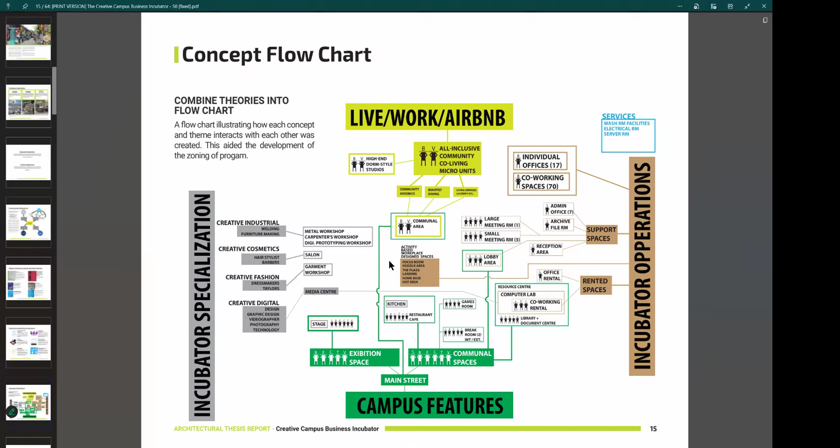A thesis project is basically your final project when you do the master's course in architecture. So last week I was showing you some examples of infographics in architecture, the use of diagrams and flowcharts and stuff like that. Now I'm not going into explaining the project, but I just said it was a business incubator. What I did was kind of went through to show how infographics is very much a part of architecture all the way to the end, which you guys already know because you presented it in your study tour, which is awesome, right?

So I won't go through those examples again because we did that in class. And if you weren't there for that class, as usual, the recording is there. What we're going to focus on today is breaking down infographics in architecture. We're going to continue our journey.

So last time we met, hopefully I helped you guys out in trying to determine what is infographics, and we kind of spent a class with me trying to hopefully guide you in creating infographics. Like I gave you a 5-step process.

It's coming up, it's coming up. There we go. I gave you a quick 5-step process in how you can create your infographic.

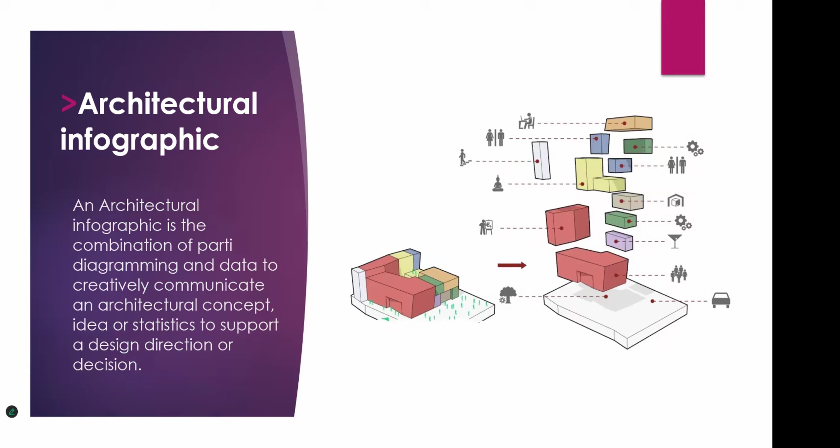So an architectural infographic is a combination of a parti diagram and data to creatively communicate an architectural concept, idea, statistics, or data. I want you guys to push your parti diagrams further, apart from just having the diagram saying look, this is the major space in this building, I want you to add some data to it. So information plus a diagram plus creativity equals infographic, which in our case in architecture, the diagram is the parti diagram, and then we just need to add information to it.

So we already possess the ability to simplify information, right? So if I take this diagram here, you guys could probably already simplify this. You guys already know how to do this already. And if you look at what this diagram is saying, it's probably saying that, okay, there is a big mass volume that is here. So you've turned it into a parti diagram.

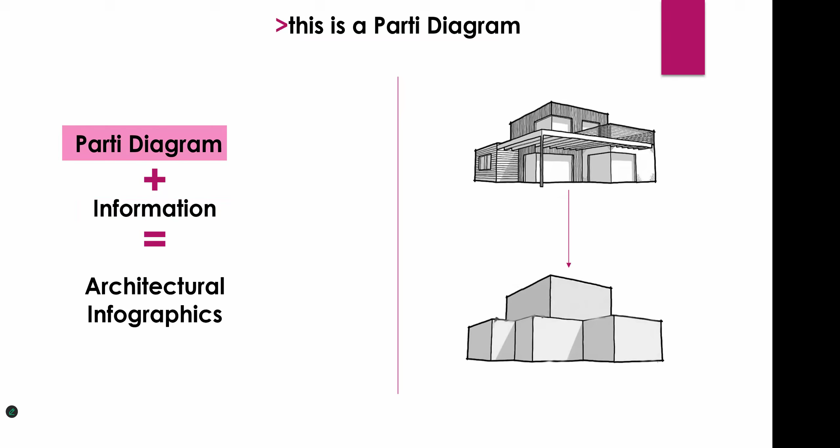But how do I communicate this information within this diagram? I mean, I could just put the text below the information and call it a day. But we could maybe investigate some more creative ways of doing it.

What do you think, Odin? Yes, I think we could investigate some more creative ways of doing it. So this is a parti diagram combined with what kind of chart? The volume chart, not quite the name. Bar. Right, Cooper got it, it's a bar chart, that's basically what it is.

So now you can not only use your parti diagram to talk about how you put the building together, but you can also incorporate it with data. And that is kind of the meat of what this whole information graphics is really trying to talk about, data and trying to express data in a creative way.

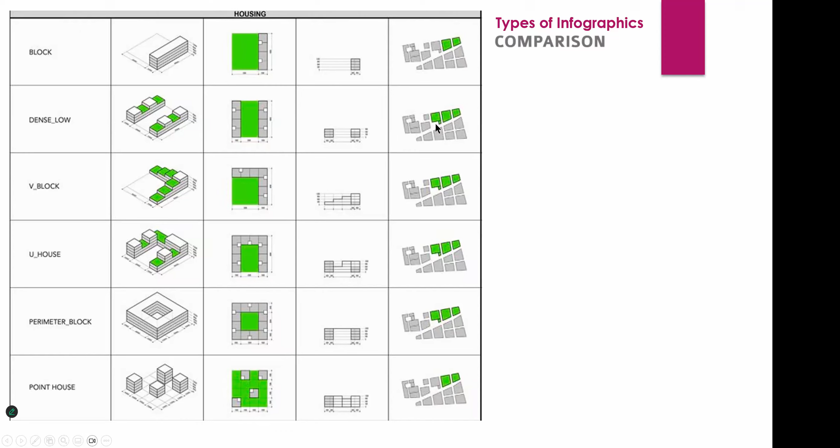This is another one as well, right? And doing something like this is great to show exploration. So for example, these are different options. You guys already did your housing project, from third year, from last year, right? You could show that you investigated different layout options for your project. And this is perhaps one of the most common uses of a parti diagram in architecture, we use it as a kind of comparison chart.

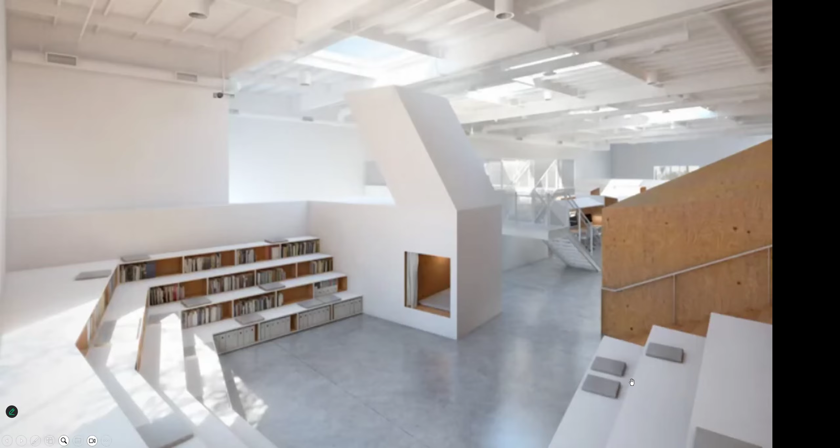This is another interesting one. Now if you look at the design on the right, I have the link here to the original design. This is in the US. Anyway, this is a hybrid office, and if you can see the picture here, it's kind of interesting - it has books that also form the seating as well. You can kind of know these spaces are well designed. But this is a nice little icon formula to say, hey, I used a bookshelf, combined it with an arena, and got a book arena. So simple, so elegant, right?

And then this is what the design looks like. So what I'm focusing on is the diagramming, because this is also information as well. It's like saying 1 + 1 equals 11, right, not 2. Because we're not talking about basic math here - we're simply saying, what if you combine a bookshelf and an arena? What would you get? It's not like a logical formula, but visually you kind of get what it's saying. So that's the information in this.

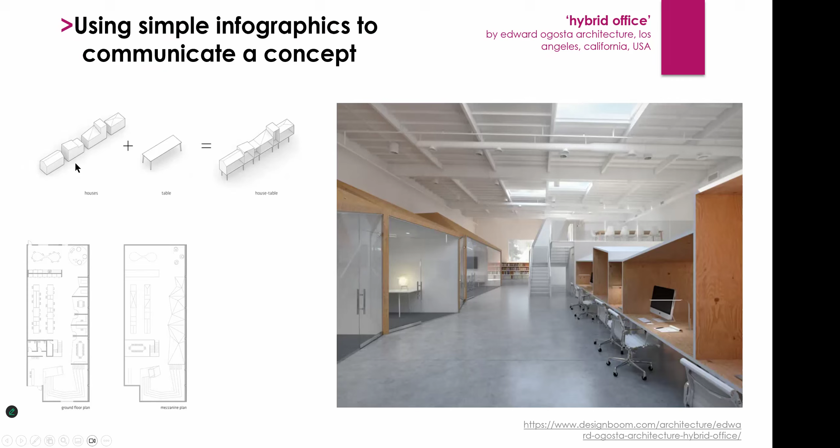It's like you're using your parti diagram to communicate additional information, not just 'this is the form of my building' or whatever. So I like these creative ways of using the parti diagram. This one is pretty cool - houses plus tables. This is what the design looks like.

So if you remember coming from infographics before, when we speak about layering of information - remember our last presentation, we spoke about how you might have a chart, but the chart could be represented as something else, and then you layer more information onto it. Kind of like that building we had that was leaning, to tell you the world's most tallest buildings but also the world's leanest buildings as well - using the exact same chart to communicate the same idea. So this is overlaying multiple pieces of information together using the parti diagram.

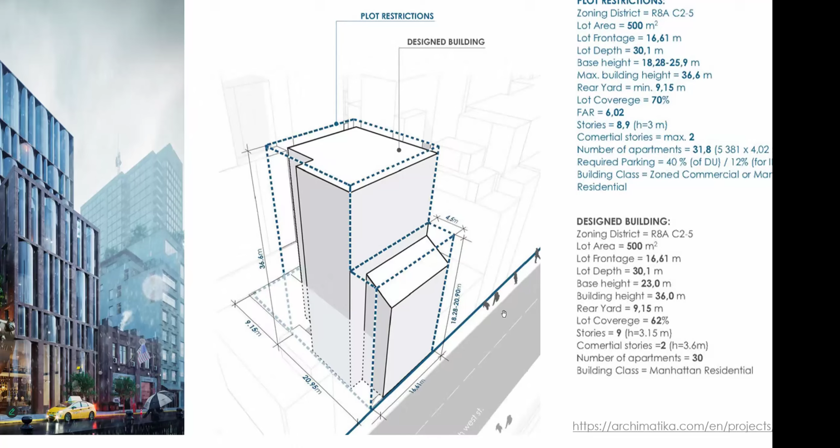So what I'll be showing you here is just ways in which you can expand beyond just having a parti diagram on your sheet. Here's another one - this one is pretty cool. This is an exploded massing diagram, exploded parti diagram, whatever you want to call it. It has different colors, but it's also communicating information on top of that. For example, the top floor has a certain amount of square footage. It makes use of these icons.

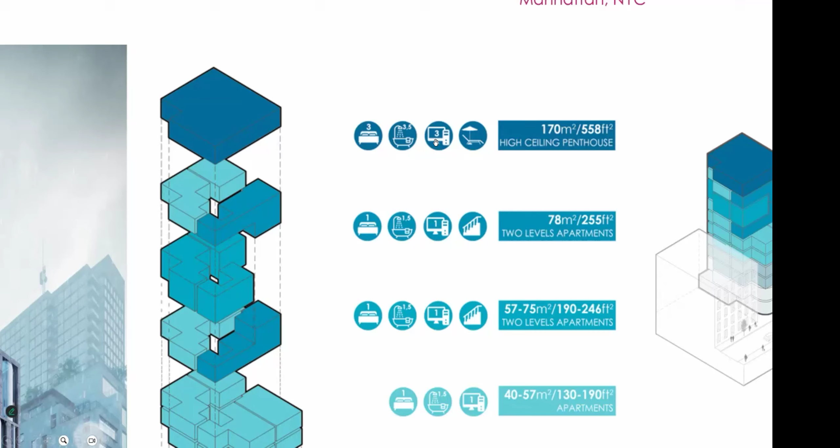Can you guys make out the numbers of this icon? I don't want to fully give it away, so I'll make somebody volunteer. What is the infographic telling me about this top floor? Anybody? What would be your interpretation?

That the unit takes up the entire floor - it's more of a penthouse. Penthouse, right? Okay, it's a penthouse.

But then look at the use of the diagrams as well - what do you think it's saying? Can you make out the text? It has 3 bedrooms. What else? 3.5 bathrooms - there you go. Exactly. Maybe 3 offices, I'm not sure what that other one is. And then maybe it has like an outdoor lounge area.

So what I'm saying is, remember what we started with in infographics - the use of icons to represent information. But now we're using the parti diagram while still using the rules of infographic design, because the color of this matches the color here. There's a kind of creativity to it, because each row has the color that corresponds to each floor. It's also communicating the shape of the building, so it's communicating multiple things in the same parti diagram. It's not like having 10 different parti diagrams on your sheet - no, you have one, and you're trying to pull out as much information from that as possible. So that is pretty cool.

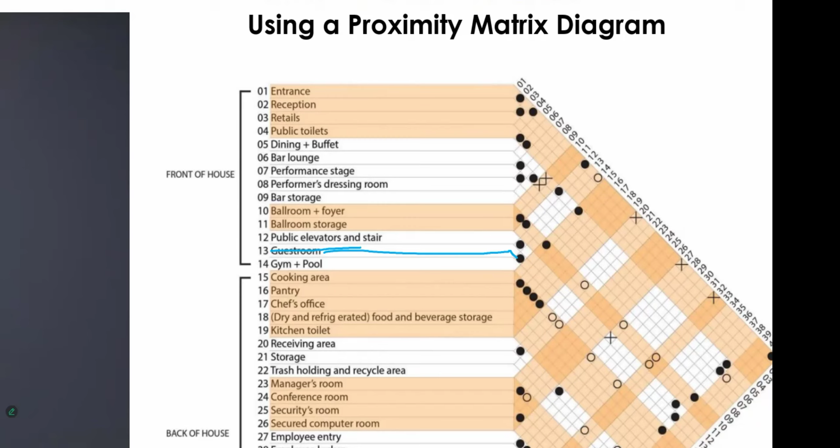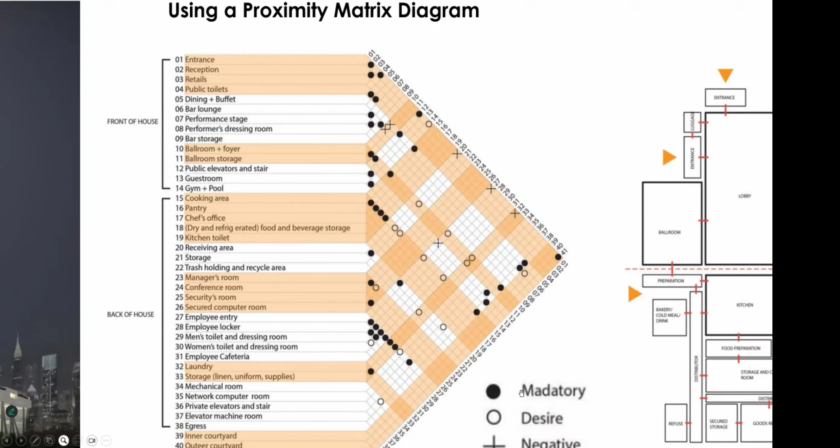Let me see what this says on the bottom. Mandatory, okay, so must be connected. And this is a desire to connect, and this is not to be connected.

So if I go back to what I was saying, without even having a bubble diagram, you can use one of these diagrams to say, I need my guest room to definitely be connected to my pool and gym. I need my guest room to definitely be connected to my egress, which is my exit. That is kind of how you read this type of diagram.

So this one is a diagram. Technically it's not a parti diagram, but it's still used in architecture a lot because you could just list your rooms here without worrying - the reason why you have this diagram is that you can design how your rooms should connect even without laying it out, because you just draw this up and shade in the areas that should connect.

So for example, you might be saying I need my dining and buffet, and you say okay, that must not connect to my ballroom foyer, but it must connect to the public elevators.

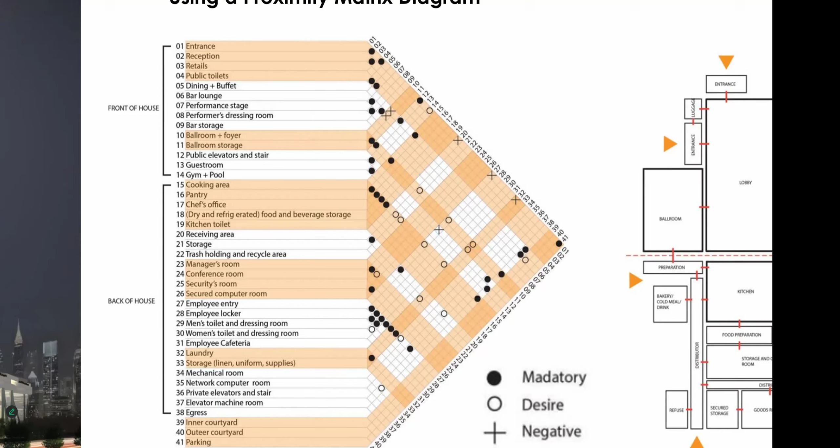So after you're done shading out this diagram, it really makes drawing your bubble diagram much easier. That's why I put this in this slide, because I don't know if you guys ever tried this strategy before. Sometimes when you get something to design, maybe you start just jumping into putting some boxes or circles and trying to figure which room connects to which. This is a more data-driven, analytical connection approach first, and then you go into the bubble diagram.

So I thought this was pretty interesting. One of these days you can try it out with one of your projects. If you have a bunch of rooms and you're trying to connect them before you do a bubble diagram, try doing one of these matrix diagrams and making them connect. Anyway, I just wanted to put that in because that was pretty cool.

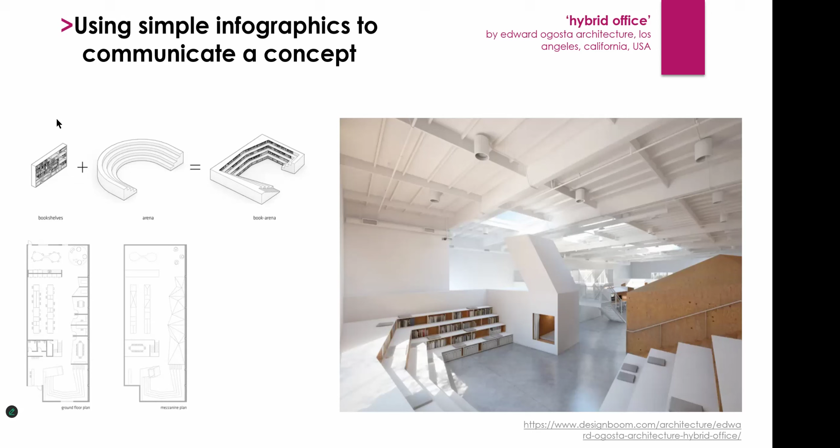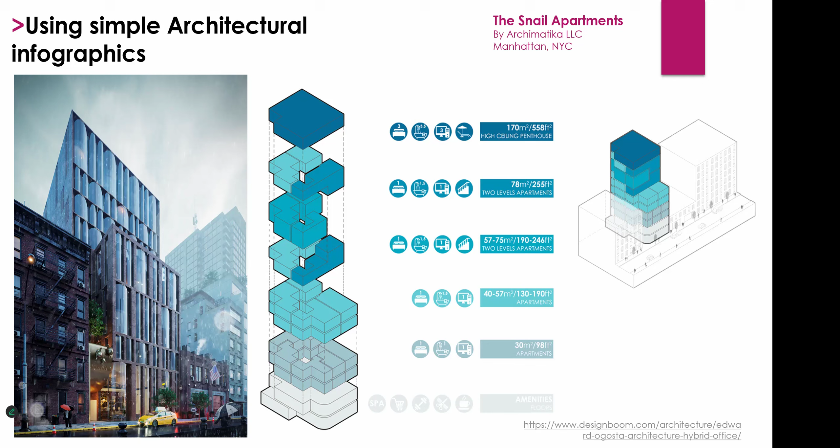If anybody here plans to move on to do your master's in architecture, this stuff is going to be super important, because going forward in architecture you start to pay attention to data a bit more. You find you have to show evidence that the data supports your design. You kind of do it now in undergrad where you do your study tour or your analysis, and the analysis says, well, there's a highway here, so you'll have noise, and this is where the wind is, and the sunrise — that's your basic data.

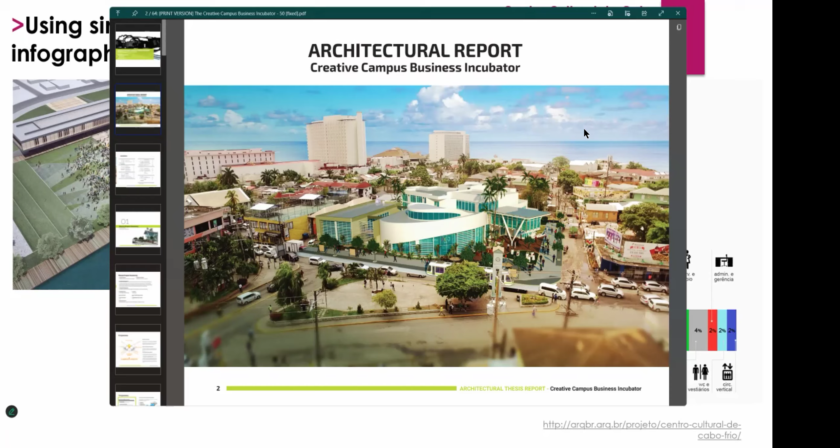But you will likely have way more data, especially when you have to do something like a feasibility study. This is what I was showing in the last class when we talked about a thesis project, because apart from just showing the plans — let's scroll all the way down here, if this can go a little faster.

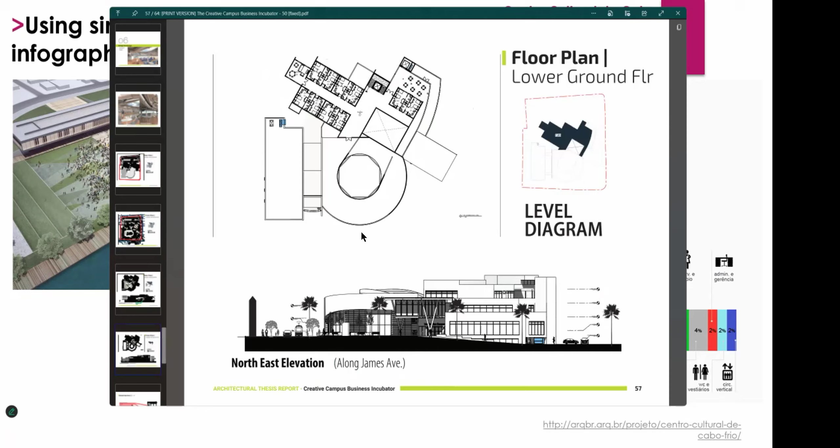Yeah, so here are the plans. The plans are in this feasibility study, elevation, sections, all of this stuff. But what drives this design in the first place? Well, you had to do your site analysis and know what's happening around the site.

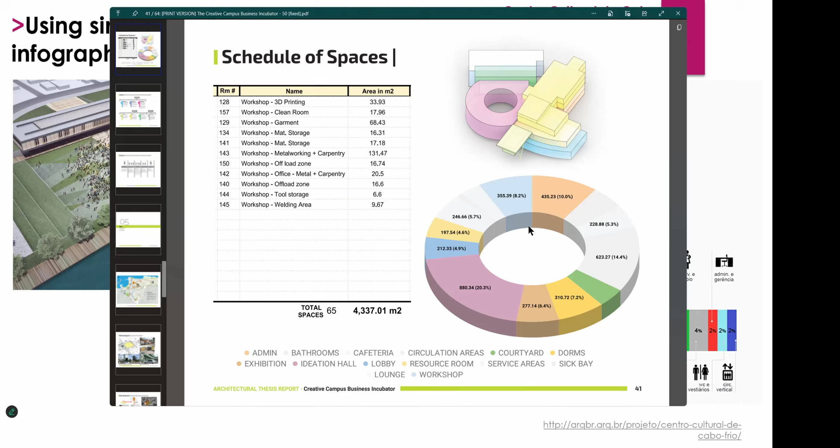But if I scroll through, there's other information to show. For example, if I'm putting up this building, how many staff members are going to be in it? What are the sizes of the different rooms? What are the requirements? Also, what about the business side of it? Like if somebody asks you to design a bank, you have to know how a bank operates. Should the vault be big, or is it just a digital thing because nobody stores cash anymore? You know what I mean?

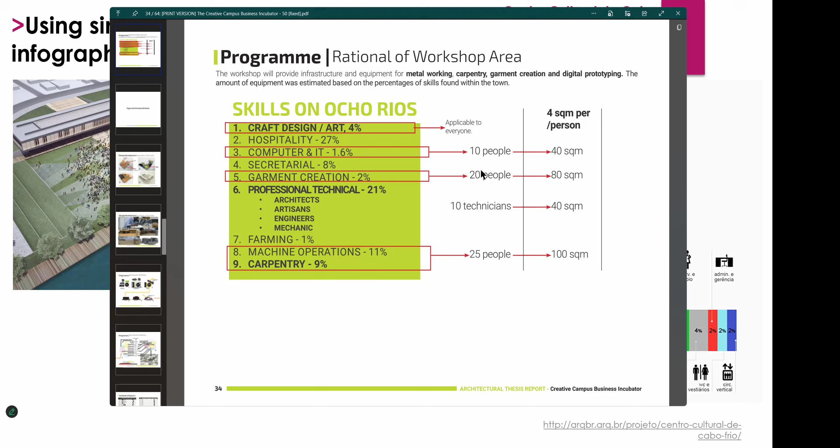So when you're presenting your idea, it has to be backed by data, and you have to find ways to represent that data. One way, especially in architecture, is using information graphics to express that data.

So for example, this one here talks about, I think, a cultural center design. The way I did it is I represented the different rooms, like offices and dining, and then there's a bar chart below. The difference with this kind of bar chart is it's telling you that in my entire building, this room here takes up 26% of my main space.

Now, Leshan, can you identify on the parti diagram where that space is? Sir? What was that, sorry? I'm sorry, you're coming out choppy, I didn't hear most of what you said. So I was saying, are you seeing the screen okay on your end? Yeah, all right, so it's the one with the picture on the left and a diagram?

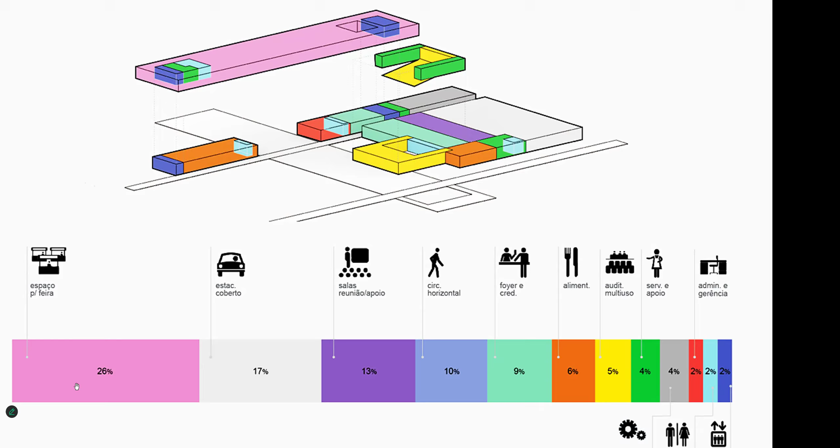All right guys, okay, hopefully I haven't left you behind. Hopefully you're following.

This is another one of my favorites. So if you look on the left, this is a 3D image here. By the way, I have links to these, so if you want to check out the page that has more information, I can give you the links. I think this is on the website as well, so if you click it, it will come up. So anyway, this is the 3D of this building.

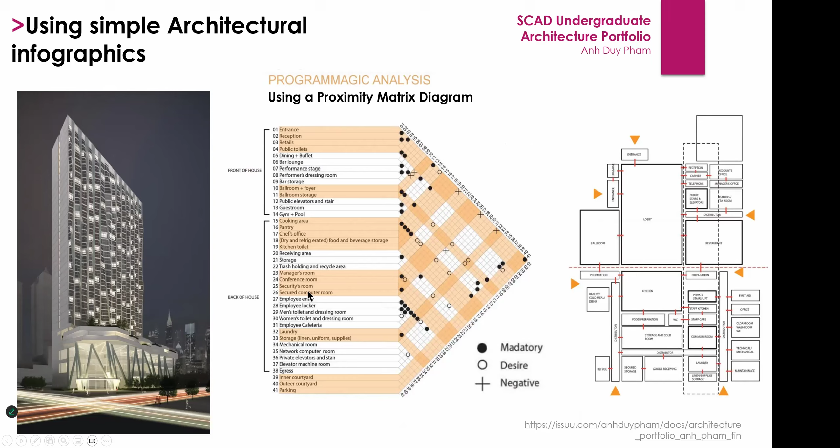And if you notice a similarity between most of these I'm showing you, these are big, complex buildings with lots of rooms. I'm showing you this because when you do a simple house, like a 3-bedroom or 2-bedroom house, chances are you don't need to show all this data because it's simple, it's done. But when you're doing something more complex, like a museum with more than 10 rooms, you should always try as much as possible not to just show a parti diagram, but to communicate info about it.

So this one is cool because what they did here is create some boxes, and they made the boxes the size of the rooms. I wonder if anybody recognizes that this infographic is the same infographic as... hold on.

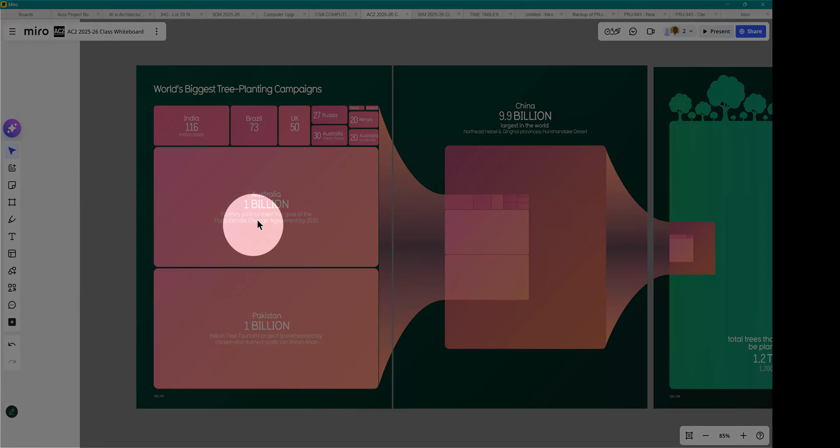It's the very same infographic as one of these guys here. You remember this one? Where we use the boxes to determine this, like the world's biggest tree planting campaigns, and use these boxes to get an idea of size. So we know right away that, well, look at China, they do the most tree planting. And who does the least? Iceland. Well, there's not much trees in Iceland, right? Anyway, this is kind of the same thing, they're just not stacked up against each other. So what this is saying is that, hey, these are all the rooms in my building.

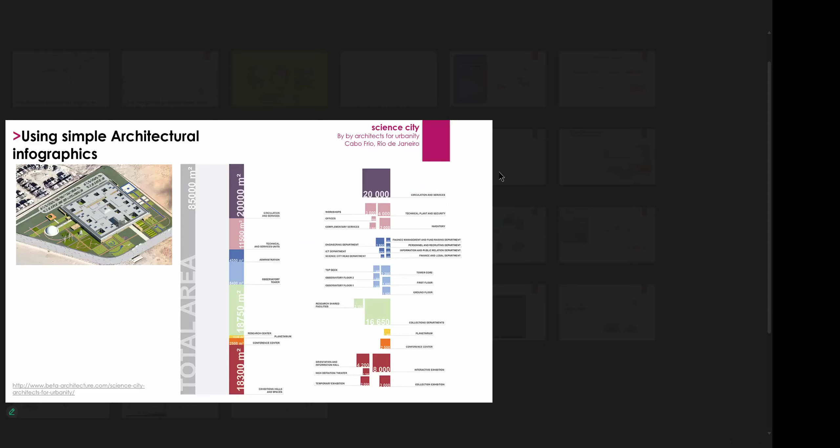These are different square footages, and this is the name of each room. But in addition to that, it has this bar chart again on the left, and you can see that all the colors here add up to give you this section on the bar chart. So really the only thing that's missing that I would probably add to this diagram is maybe color coding it in this area here.

Now this is a cool one because this is a bubble diagram, but it's a little different. As you know, a bubble diagram... one second.

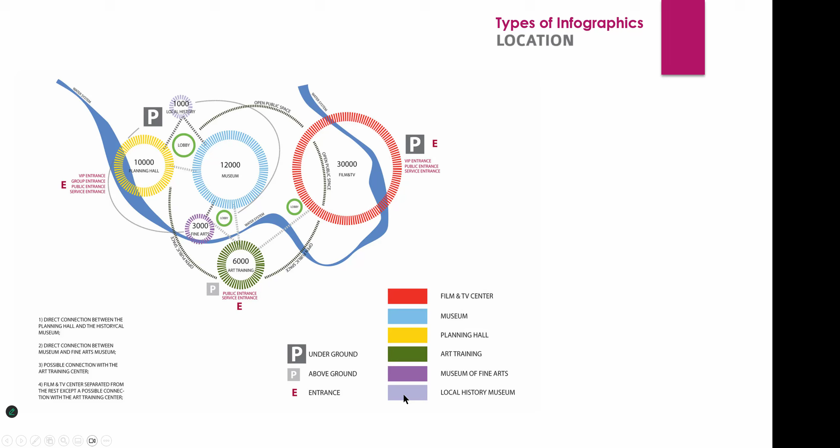Yeah, sorry about that. So this is a bubble diagram. Now the reason I show you this is that a bubble diagram doesn't have to be of a building, it can be of an entire site, and this is an example of that. You can see where the different colors show you how everything is connected together.

So I'm showing you this because sometimes in your presentation you want to reference a broad topic, like suppose you're focusing on trees or climate change, and you need statistics on how the Caribbean is dealing with climate change, or what year sea level would rise. Whenever you need this information, and maybe want to include it in your infographic, don't just Google it one place and use it. Try to get it from places like the World Bank, World Health Organization, Google Scholar, UNICEF, a lot of these places have a lot of data. Sometimes we just Google it and throw it in our presentation, so when doing the infographic, make sure your information is correct, try and get it from the source. Google can be a little all over the place.

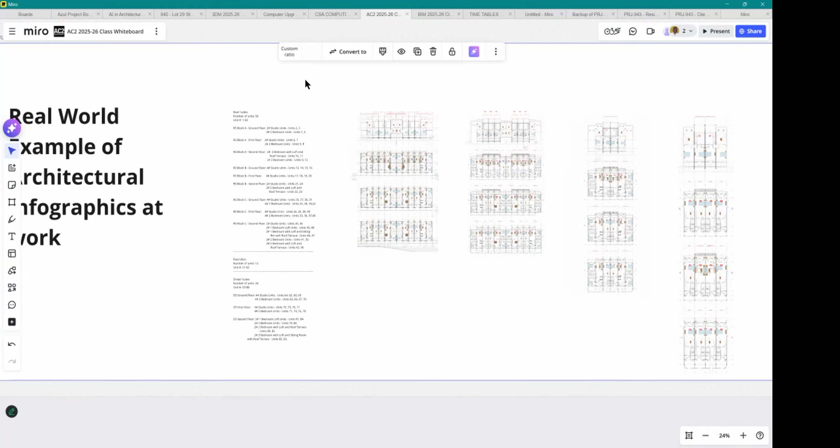All right, this is where my talking ends. Now I have something interesting to show you here. Hopefully you guys are still with me. You guys still with me? Yeah? Not gone to bed yet? Not yet, sir, we're still here. Not yet, alright, that means soon. I'm going to, what time is it? Hold on a second. Oh, we're good on time. All right.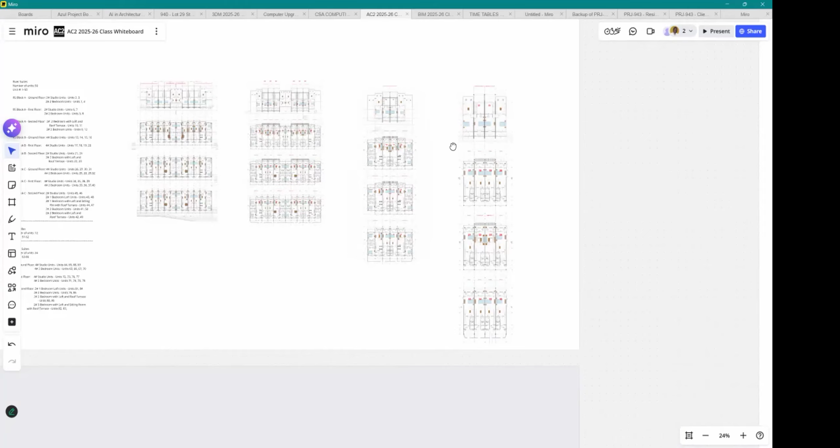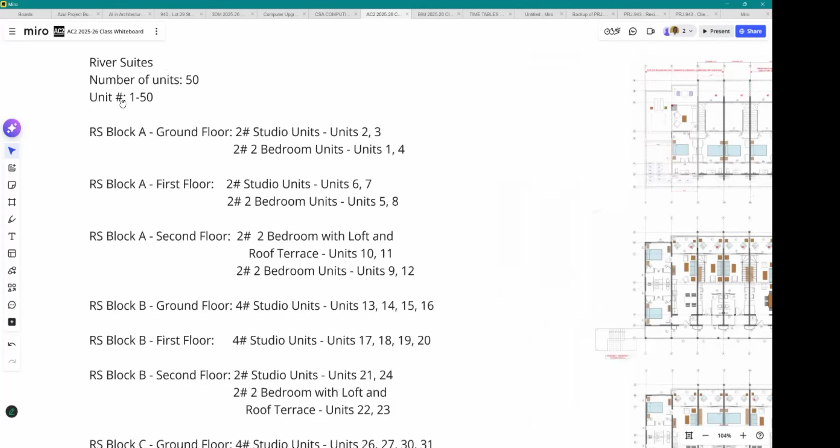So this was a project that I did some years ago, right? And it had a problem. I don't have the elevations in here. Oh man. But I had the elevations, now I'm gonna have to dig them up. Anyway, the issue with this project is that they had 3 different blocks. They had the river suite. So this was a resort, in Jamaica by the way, it's built already. But they had a challenge with communicating the rooms.

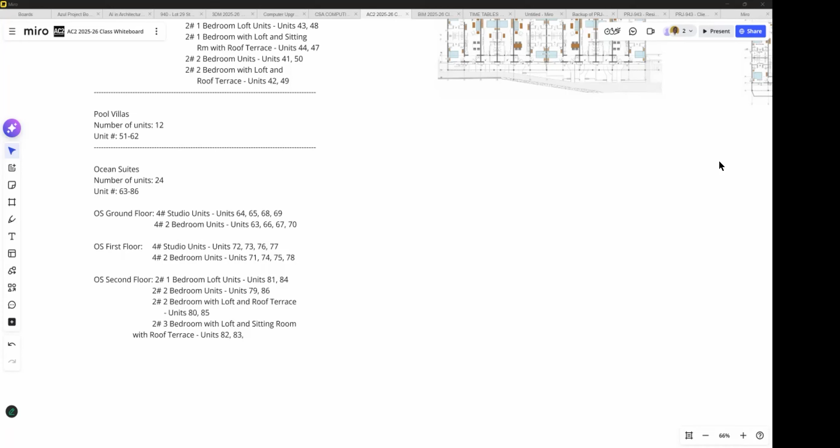The reason for that is, usually when you have an apartment complex, you would say, oh yeah, we have 10 three-bedrooms and 20 one-bedrooms, and that's about it. In this case, let me tell you the value here, they had more than 15 room types, which is a little crazy. And everybody was getting confused as to how many units are in the building, where their units are located in the building, where on the site the units are located. This is a common problem when you have these developments, like you see most of the developments going on in Kingston, you guys see a lot of that.

A lot of them have pretty much studio, 1-bedroom, 2-bedroom unit types, and usually that's it. But what if you had 3 unit types? You could have a diagram that shows your 3 unit types, like something that tells you floor 1 to 3 is studios, or maybe you'd show it in plan: everything on this side is studios, everything on this side is 1-bedroom. These are all ways of representing information about the plans. But in this case, they didn't have 3 unit types.

Let me tell you how many unit types they had. Now I want to give you guys a little brain teaser, for you to figure out how you would represent this information.

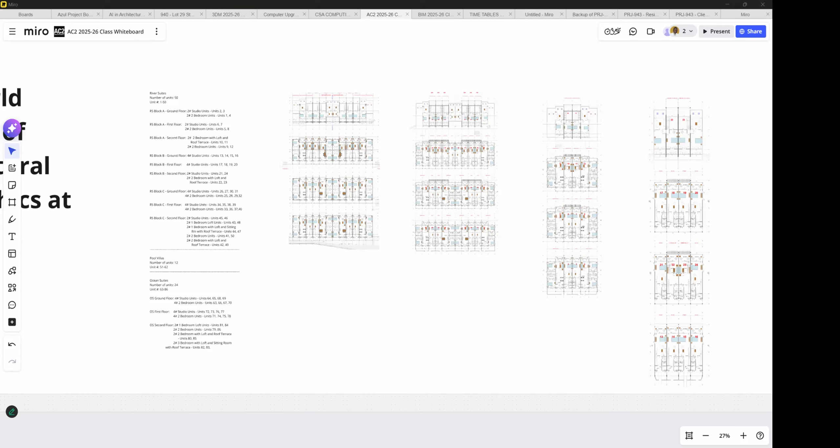Let me find the folder with it first. Bear with me a little bit. Let me see what I have here. I just have the plans and the rooms. I'm trying to see if I have some more information here. Let me just see if I can put it on the Miro board real quick.

Architectural Infographics. What's this project called again? It's called Bessa. Okay, there we go. First it's empty.

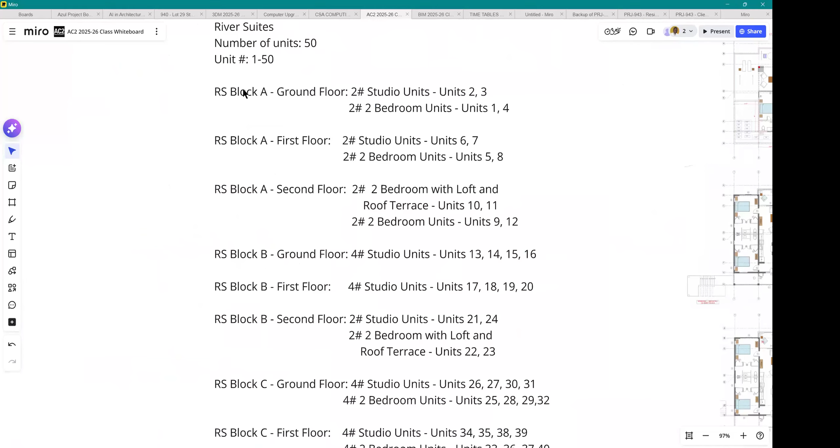All right, so while this extracts, because I got everything all compressed - in this case, these were all the different units that were located. So what was delivered was a bunch of plans, right? And the reason why this was confusing was that the plans span different floors. So it's not just units stacked together, but you have units that span across different floors.

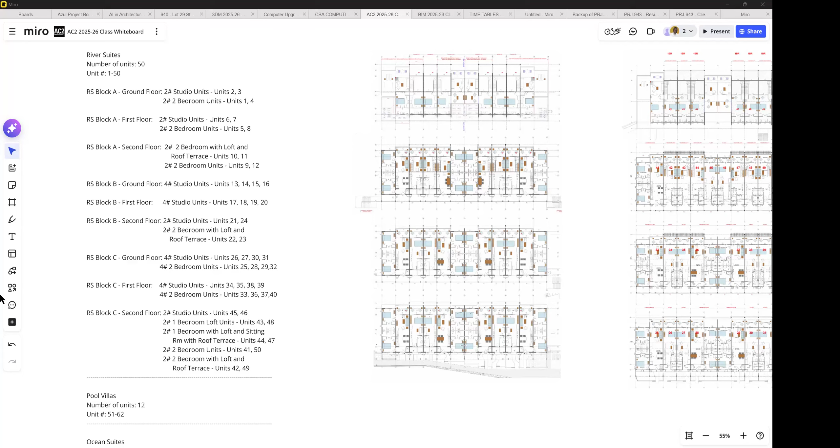Here we go, let's see. All right, plans. So then there were different blocks. For example, this was one block. This one block had 4 different floors. And I was hoping to find the elevation could help, but I'm gonna get it in a little bit.

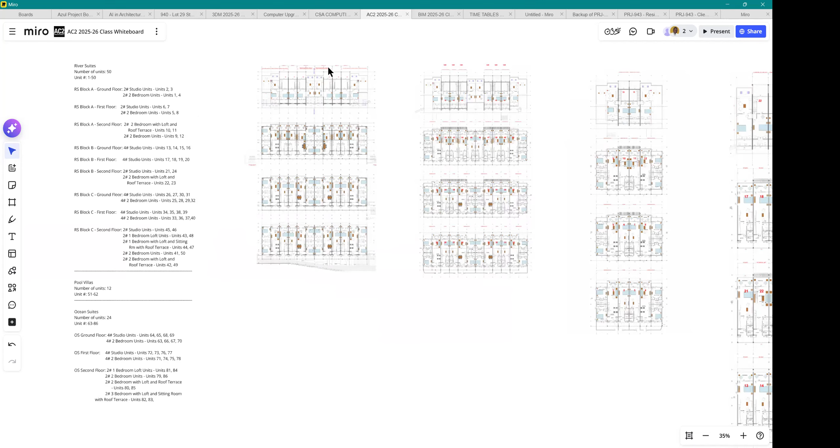And then you had some pool, and then you had some ocean suites, right? All right, here we go. All right, good, there we go. Now, see if you guys can follow me now. In total, there were...

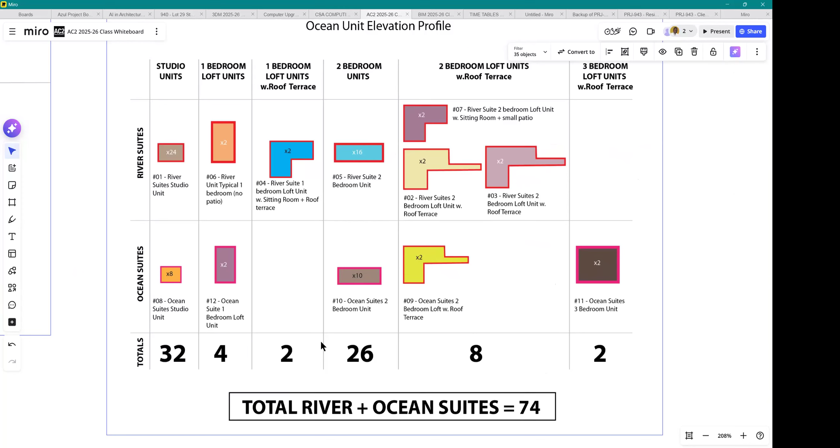What had to be done for people to understand how this worked: they needed to know how many units there were in total, and they needed to know where the units were. Now, initially, they tried using the approach from a plan perspective. So for example, if you look in the plan, you could say, okay, this is my ground floor here.

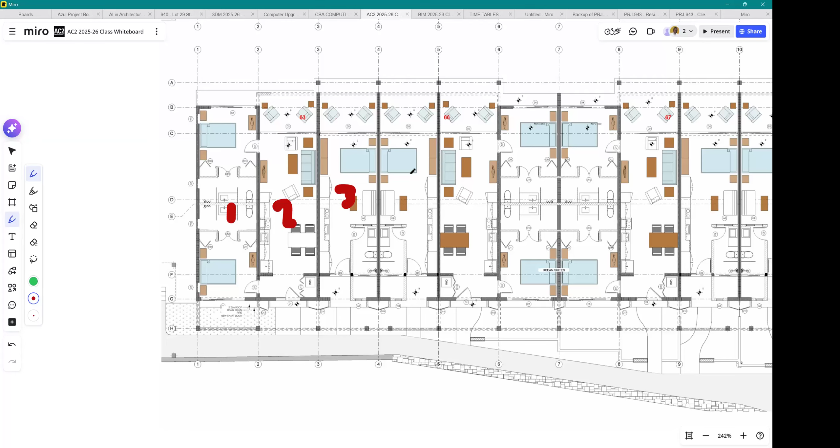And if you look on the plan, you could say, okay, this is one - oops, where is it? Sketch, let me use this. Here we go, too big, this is red, let's make it smaller. You could say this is one plan that is here, so you could have a plan here: 1, 2, then 3, then 4, and so forth. So each of these areas here are different plans, which is pretty straightforward, right?

Now, if you look at some of them, for example, this unit here - both of these come together to form a 2-bedroom. In this area here, it's a 1-bedroom. So then I put the word 1 in there, and then put the word 2 here. So if I were trying to communicate this to, say, somebody interested in buying one of the units or wanting to know how many 1-bedrooms you have, I could do a diagram like this where I hatch out where all the 1-bedroom and 2-bedroom units are and so forth.

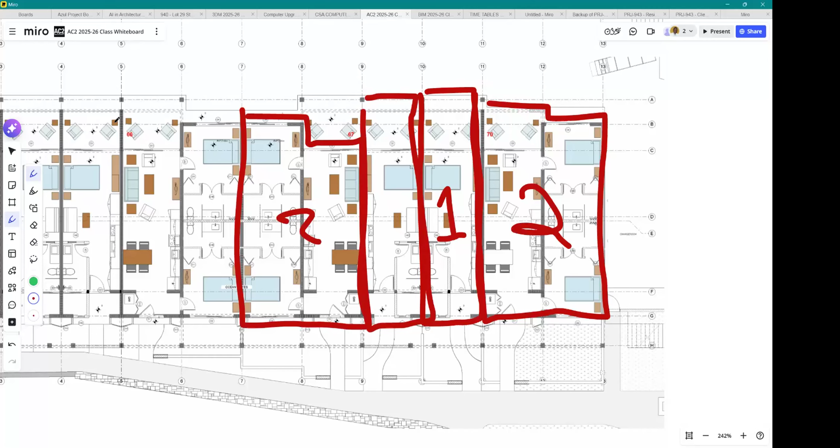And this is one of the reasons why you do this in architecture, because especially where you have residential units, multi-floor, it's very easy to get confused where the units are. But this is pretty straightforward because, you know, this is a 1-bedroom, and then 2-bedroom, and so forth. So you would have sections where it's combined - for example, this is a 2-bedroom, and then it has a 1-bedroom in the middle. And then this mirrors on the other side, right? So here's my mirror line here, everything over here is mirrored on this side.

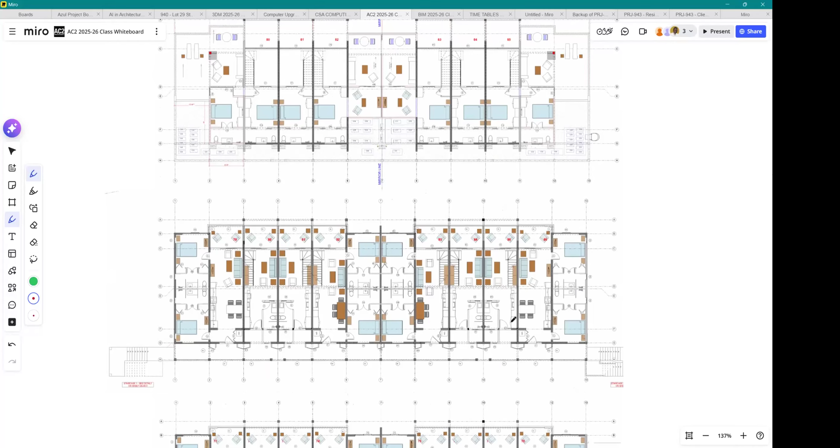But the reason why this gets a little tricky is when it starts going to the other floors. So the second floor is fine, shows it just fine. But the third and fourth floor, now if you follow what's happening here - this is a 2-bedroom, that's here. But then this here is a 2-bedroom, but it has a stairs, and that's the stairs that's right here. And this stairs carries me up to this level, right? That's right here.

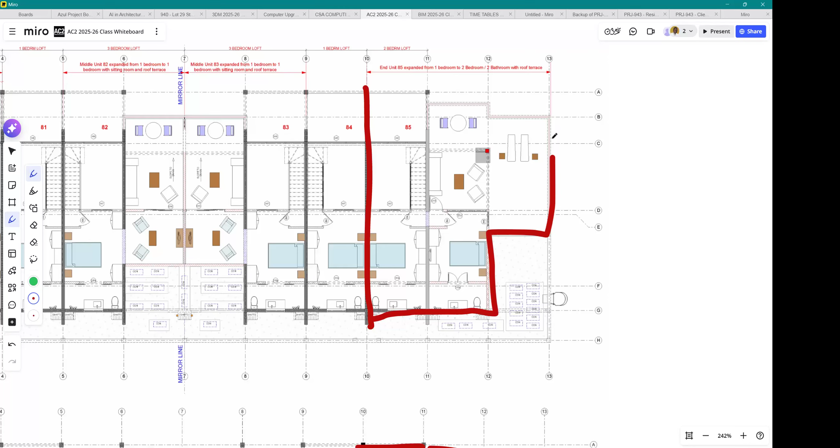So here's the stairs that you come up to, and you have the other room that is here. And then, to make matters even trickier, this room extends over to here and has a lounge. So this was what was confusing a lot of persons, because the room that is above this room, it's not as simple as just to put this in plan.

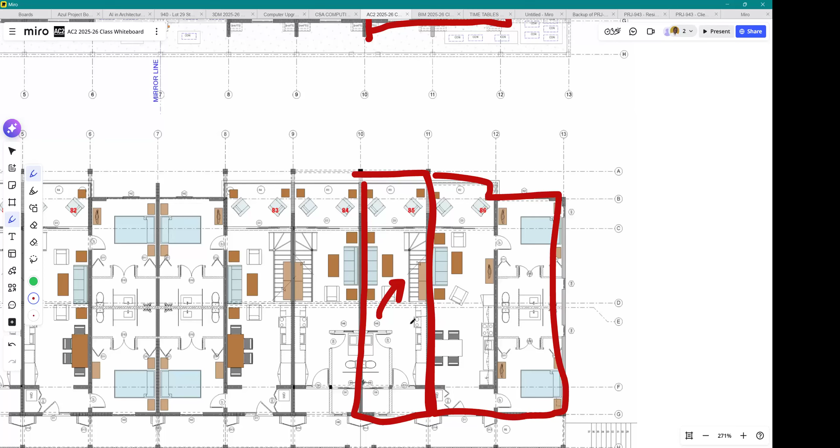What happened is they were trying to create a brochure to communicate to the people, both to the contractor and the architect. The architect had to communicate with the client, and the client had to communicate with their buyers and investors. So the architect had to figure out a good way to communicate all these complicated unit layouts in a simple way that people can understand, including the amount of units and where they're located. I'm just giving you a piece of the confusion, and this is just one block. Of course you have this repeating, but I'm showing you one of the more complicated blocks.

So this is where we turn to information graphics, specifically architectural information graphics. Let me scroll down here. This is what it looks like. These are some renderings I did a couple years ago. So this is what the outside looked like.

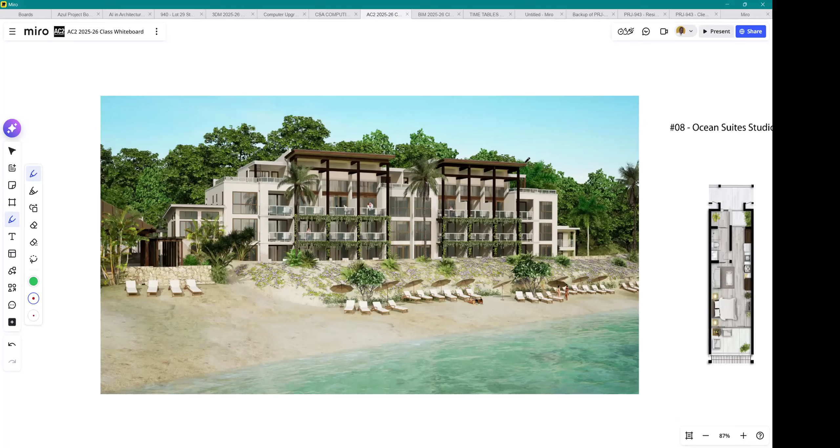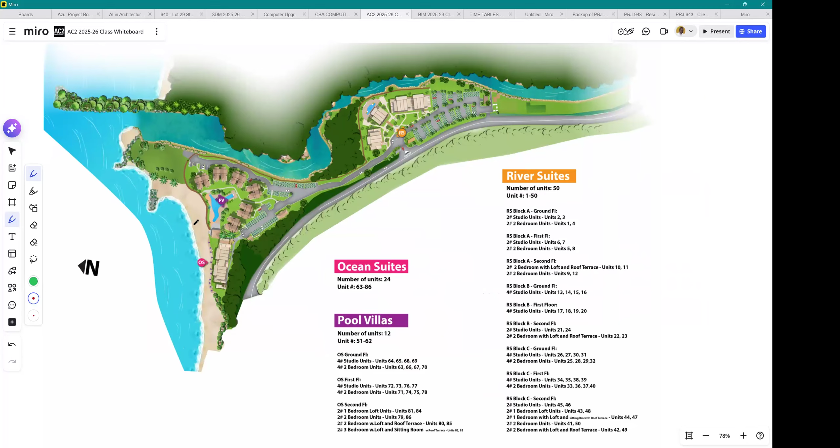However, these were the solutions proposed to make the scheme easier to understand. Firstly, there's a site plan, which is pretty straightforward. The site plan is here, and it labels all the different units and where they're located. Then there's an aerial view, showing clearly there's an A block, a B block, and a C block. This is just a very basic way of representing this, with colors aligned with A, B, and C.

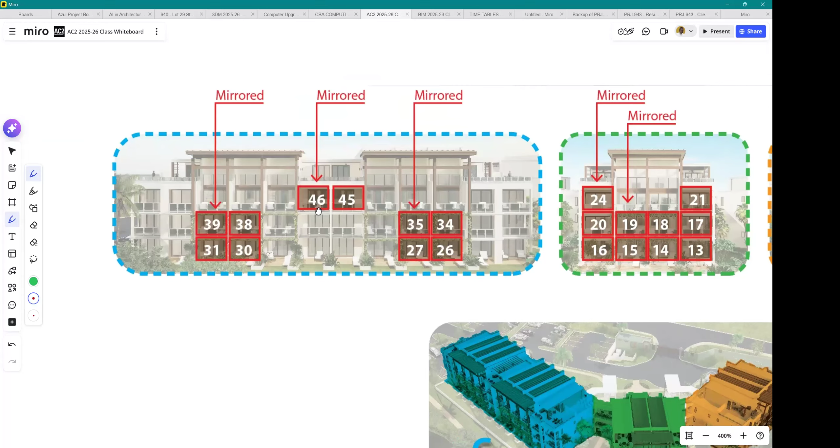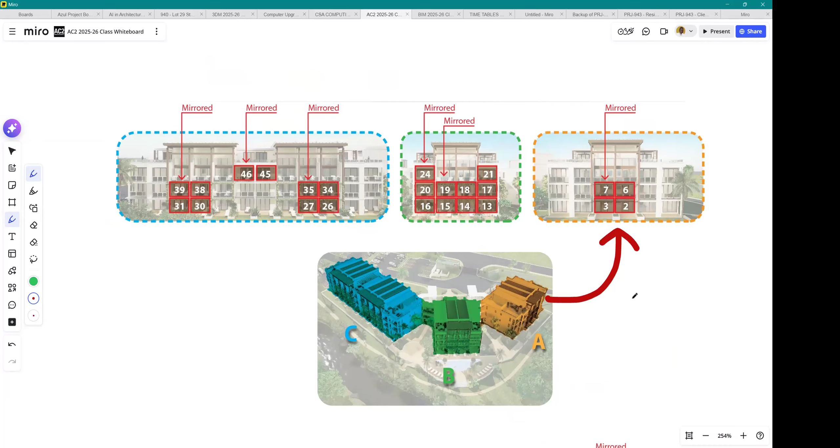Now this is where things get interesting. These are the elevations of each of the units. I think this one answered where all the studio units are located. If you look here, this block communicates here, this block communicates here, and this communicates here. Now this was done in a brochure, but for our purposes in this lecture, I've taken out all the graphics to show you so that it's easy to understand.

If you look on the elevation, you can see these are where all the studio units are in this entire block. So somebody looking at this can say, oh, unit A has studios here, unit B has these very same studios but now around here, and unit C has these studio units here.

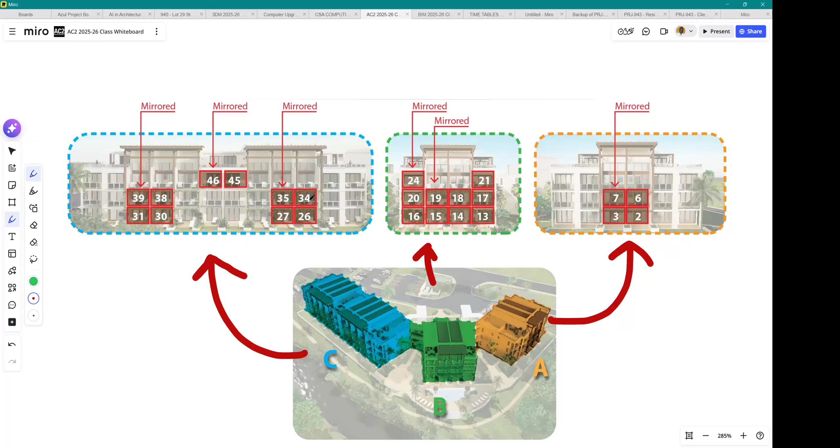Then notice that there is a mirrored highlight here. You guys probably did this in your housing project. So when we say something is mirrored, Alexia, what does that mean? Basically that it's flipped. Exactly, that is flipped.

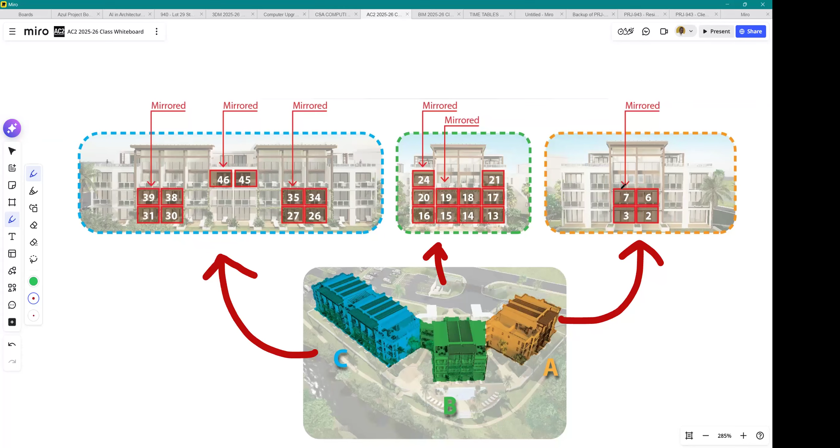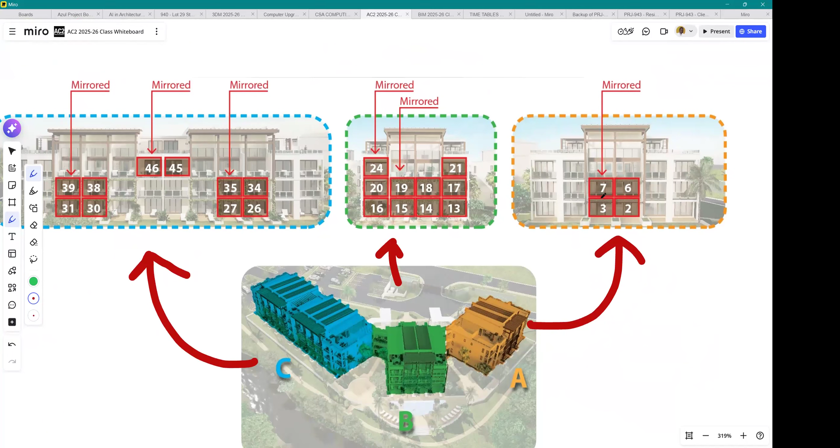So when we did these diagrams, we labeled these mirrored so that they know that when they look in the brochure, they're really seeing the ones on this side, and then this is going to be a mirror. So that it was legally communicated that the bedroom is going to be on this side for this unit.

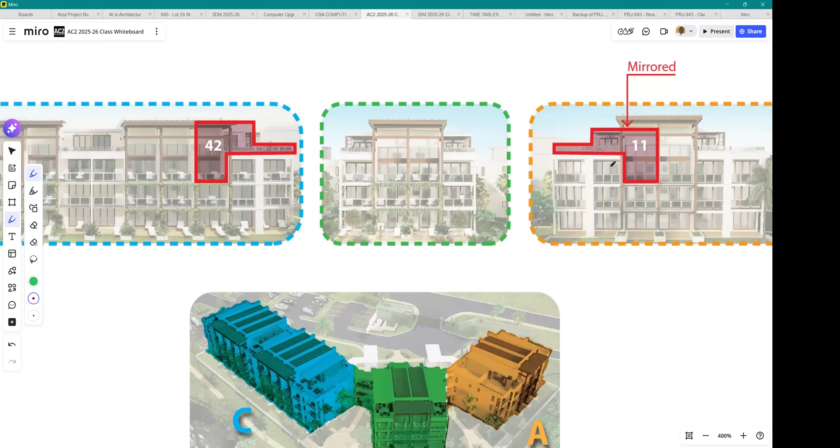So let's look at this other more complex unit now. This is the penthouse unit. If you look how this is kind of interesting, and this is what confused a lot of people, because this unit that's here goes upstairs and then it stretches over the units below. So imagine you're showing that in plan—it was hard for the customers, it was hard for the client to kind of follow. It was like a puzzle of different plans.

But when we look at it this way, we can say, oh, so we have one unit that's here and a unit that's here, and we can see that it stretches over this area, these two plans here.

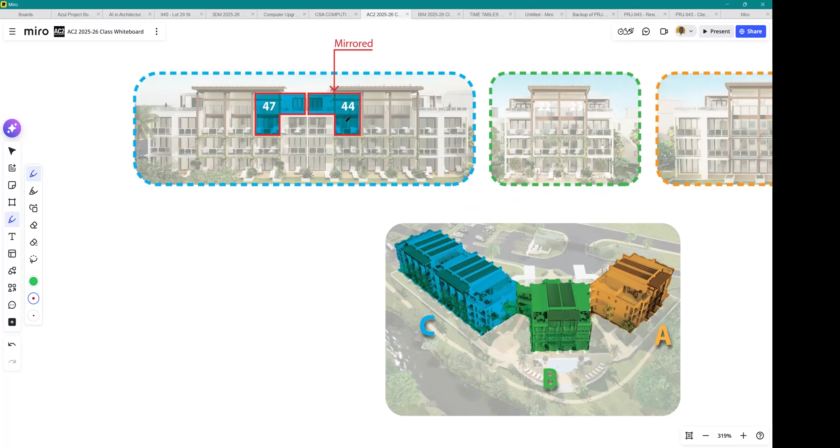Then here we go with these units, and check it out. These units actually go over like this, because when you approach this unit here, you go upstairs and then you go over to the other unit, and then this is mirrored on each side.

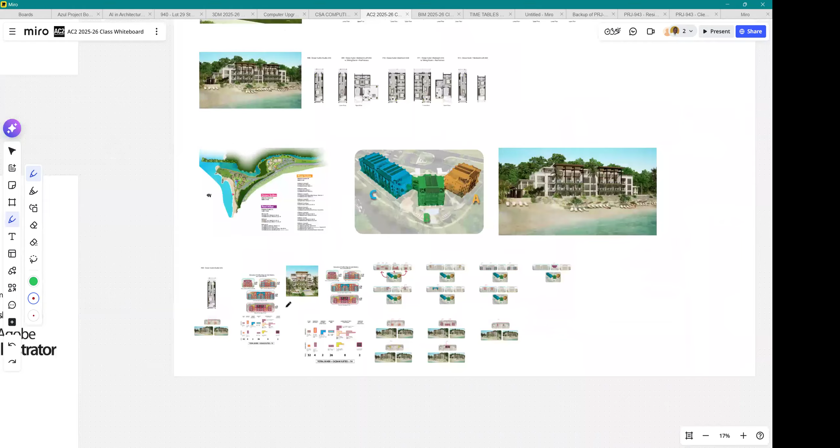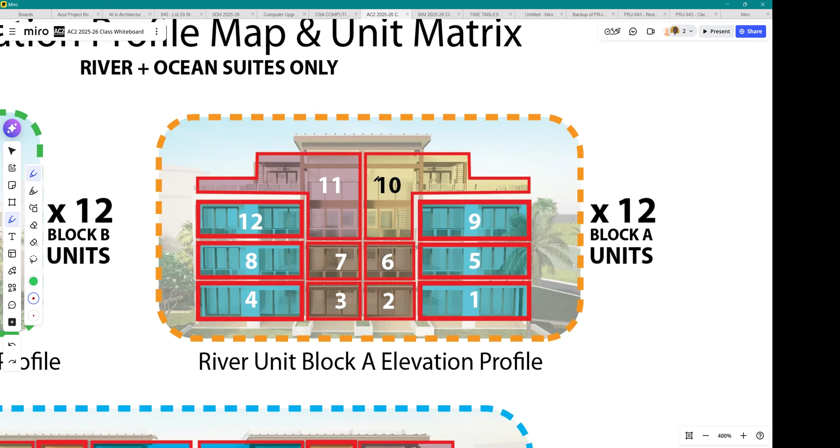So let me show you this other diagram now. This was the page that was inside the unit. Let me zoom in on this one - this is how all the units were stacked. I believe the colors in here were color coded with a key. I just took this out of the page, so I have the key down here.

Most of the understanding of this unit was done from the elevation view, not from the plan view, because it was much harder to understand from the plan view. For example, look at this unit - these are the different unit types in this building, which is insane. Normally when you have a block, you have the same units repeated over and over again, but the way this building was designed is almost like a puzzle piece, and the different units fit together to form the building.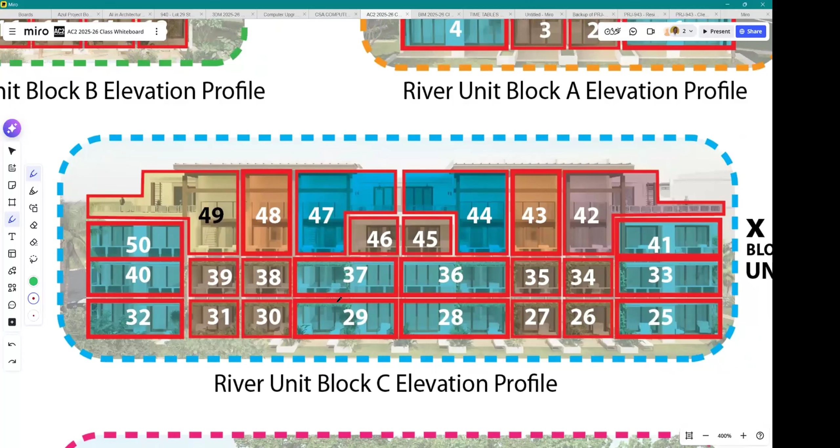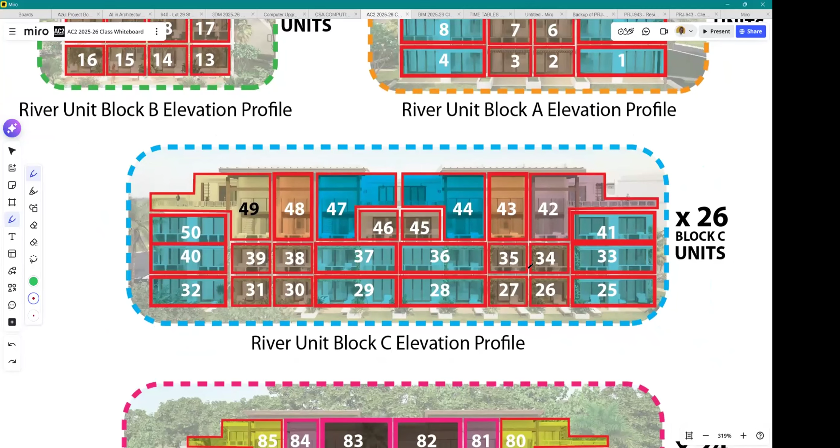I don't know if I've confused most people, but this is what was confusing. I make sure to document this for you guys, because this is the kind of problem you visually have to solve with infographics. Now we did this unit matrix down here.

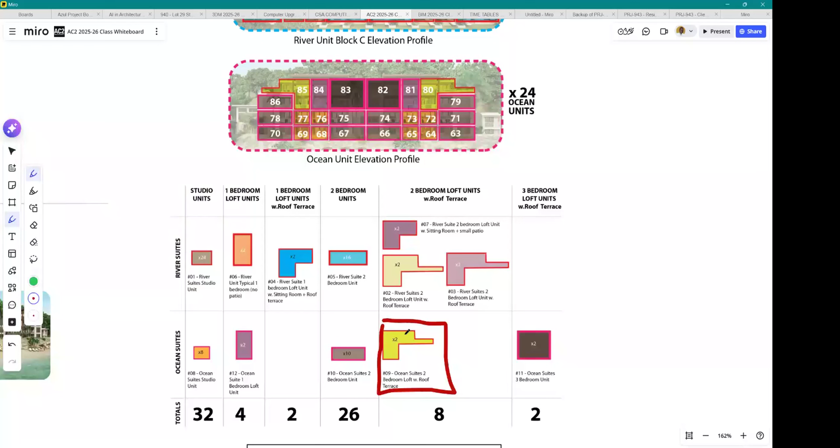Mic check, I'm back. Right, to help people understand where the units are. So when you look at this matrix here, you can say, oh okay, let me get one here, like the yellow - this is a 2-bedroom, let me circle it here, with roof terrace. And I know this unit is located here, because I can see the shape and the color, and the shape and color is aligned with this unit here. Now, if you notice, there are 1, 2, 3 different types of this unit.

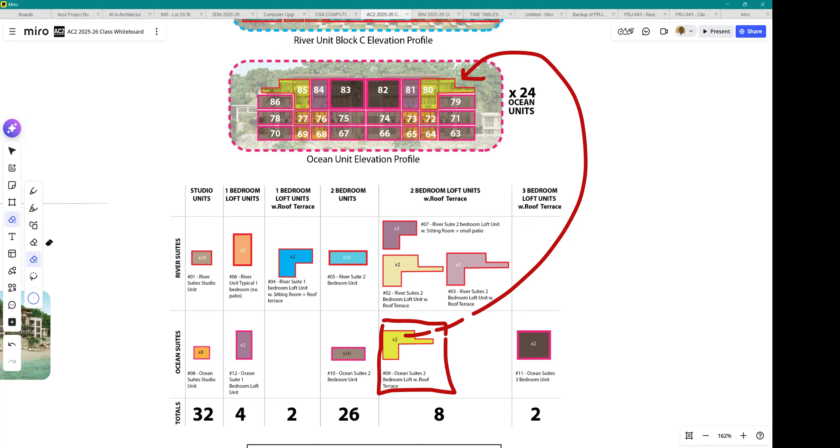Which is also insane. Now that this memory is coming back to me, yeah, this project was very insane. So if you look here, these are all penthouse units, but they have something in them that makes them different - maybe they have an extra closet, I don't know. So the fact is they had 3 different types of penthouse units spread across 3 different blocks, and they were arranged in this method.

So you can imagine it was a little bit complex to understand this. I mean, even the contractor on the project was at times confused as to where the units were located, I'm telling you. And you can kind of see why, because it's like this.

Granted, I love the design because the objective was to not make the units feel pancake stacked. They wanted an interesting blend of different units, but the side effect is that it became very tricky to understand how the units are laid out. If you need to shop around for a unit and want to know where it is in the building, it became very confusing.

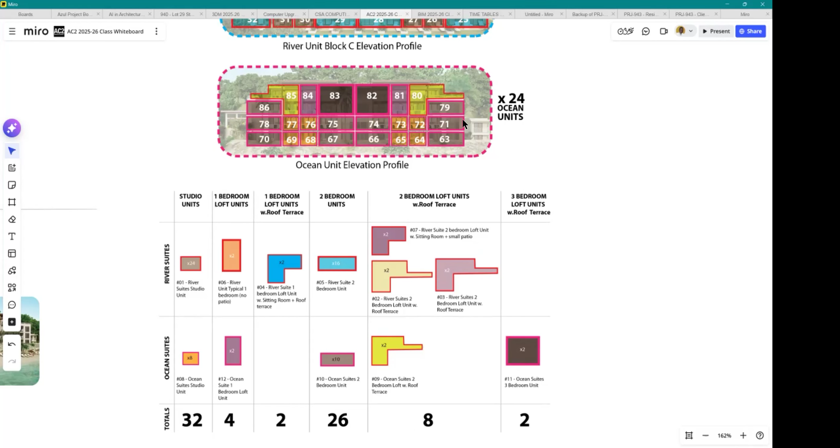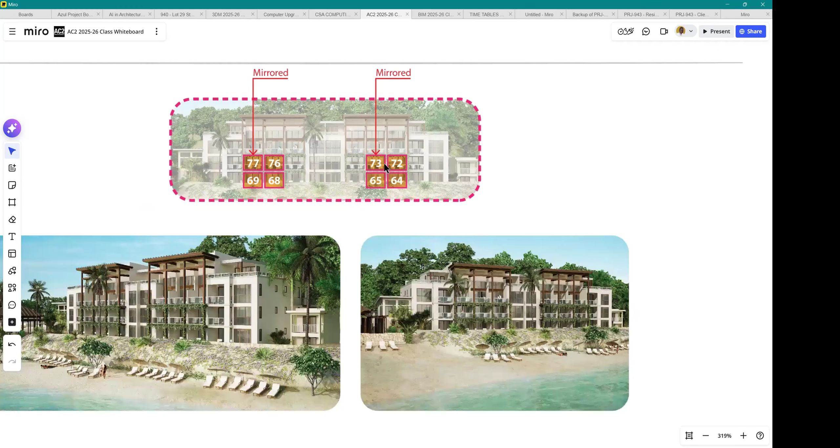So this was a matrix that was created down here, and it was aligned with these here, and these were created on the different pages. What they did with this is pin it up in the site office, and all the contractors, subcontractors, and potential purchasers used this infographic to know where the units are. If somebody is interested in unit 76, they know unit 76 is exactly here in whichever block. And that is the story of this infographic project.

This is available on the Miro board, guys. I pasted it there so you can look around and check it out. As I said, I kind of broke it up into little pieces so you guys can see. I guess this is a little complicated because it was a complicated project in terms of the unit layout.

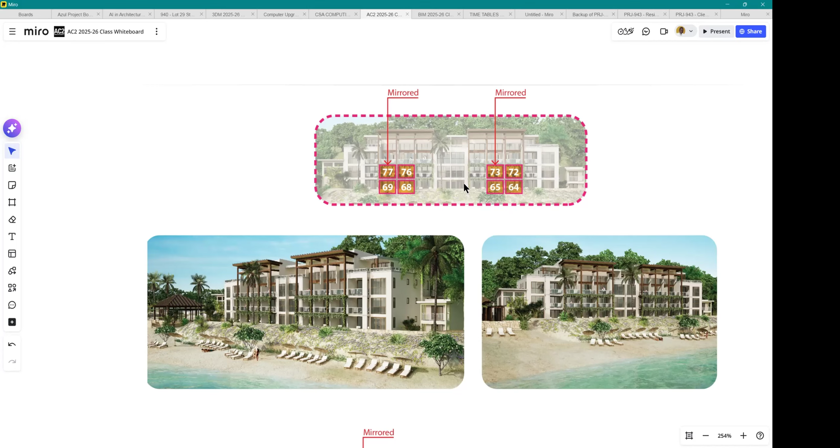But it's an example of how you can use infographics - this is like the London Tube diagram that we started off with. When they made a map of the London Tube, everybody was confused, and it had to be simplified into straight and diagonal lines. This is the same thing - it had to be simplified into boxes so people could understand how the units are laid out in the building.

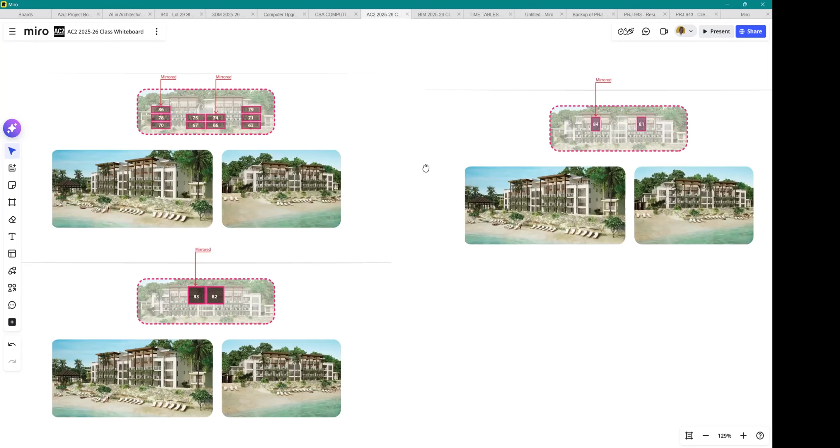No, sir. All right. No, I mean, usually what we do is I would give you a problem like this to solve, but that's okay. I'm just kind of going through showing you some examples for now. So if it's this, these are the different units that were here.

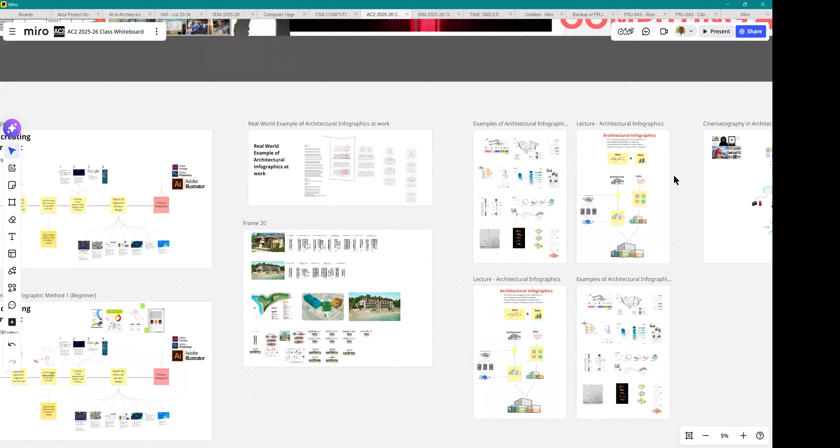Yes, bring back memories. Anyway, now I also have here some examples of architectural infographics that we spoke about, right? The examples are here, so you can check them out, and I also put the links there so you can check out where they're from. Some really interesting ones here, like I love this one.

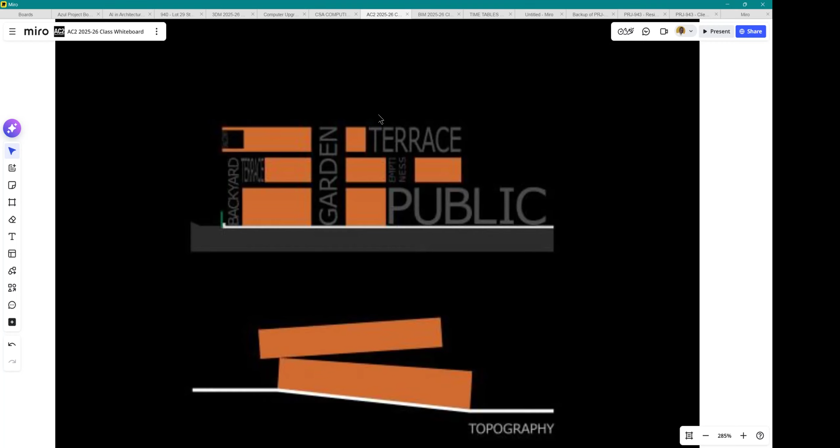This is a kind of word representation, but the word tells you where the spaces are, right? It is a parti diagram, but it is also, you know, an infographic as well. Pretty cool. Here are some other ones that are here as well.

All right guys, so that is going to be our discussion on infographic. Now,

Who here has finished assignment 1? All right, who here started? Let me not say who here finished it. Show by thumbs up. Who has started the assignment 1, the first infographic?

Cool, I saw some persons showing me some, like one person reached out and asked me for a mini critique. I'm not doing mini critiques. I will give a little hint as to where is this information, but I'm not going to. You guys are, it's an assignment. You're supposed to submit it and I mark it. It is not a presentation.

However, has anyone done any illustrations in their digital notebook? Any ideation that was done? Yes, sir.

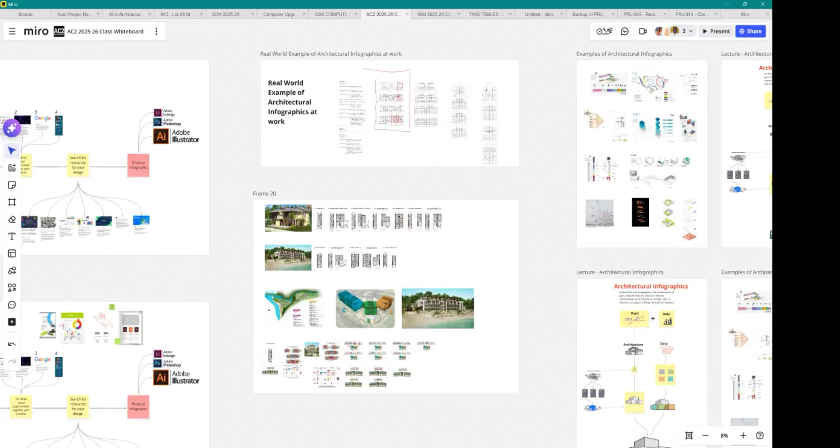All right, okay, so what we're going to do is, schedule here. I'm going to give you guys some time to finish up your infographic assignment. I see here most persons started it. Anybody finish it? Last time I checked, I didn't see any submissions. So no, nobody will finish it yet. So that is going to be due tomorrow. So I want you guys to use the rest of the class time to finish that up.

Then we have a class activity on Monday where, just like how I showed you, I gave you some tips of how to do a regular infographic, we're going to do that, but for architectural infographic, right? We're going to do a little short selection process, let's call it that, and we will unveil assignment 2. So we're going into assignment 2 on Monday. All right, guys.

So on Monday, last time we didn't get to jump into any programs as such. I mean, I showed you some examples, but still walk with your programs on Monday. All right, guys. We're going to go into architectural infographic, do a little class activity, and unveil assignment 2. All right.